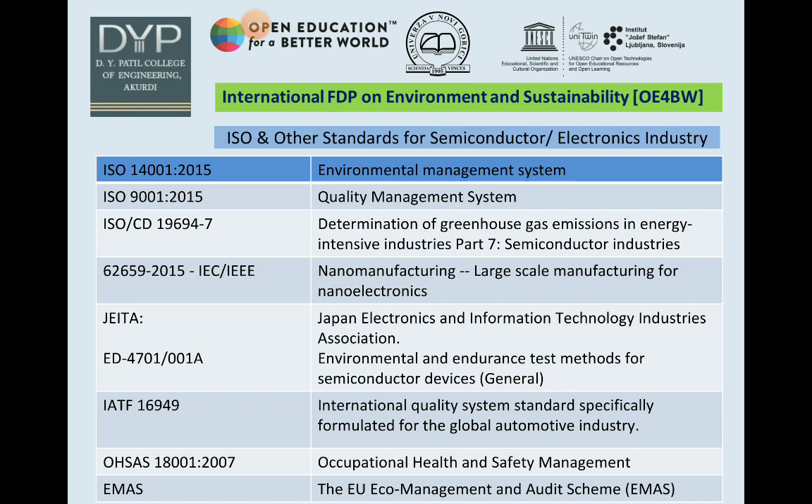JEITA is a Japan Electronics and Information Technology Industries Association standard. IATF, OHSAS and EMAS, these are eco-management and audit schemes followed in the semiconductor electronics industries.

Moving ahead, the emission categories which are described by Greenhouse Gas Protocol are specifically categorized in three classes: all direct emissions, indirect emissions and all other indirect emissions. In the first class, the gas boilers, fleet vehicles and air conditioning leaks, for an example, are considered.

In the indirect emissions, during the production of energy, if any electricity is purchased, that is included. And in all other indirect emissions, sources that do not own or control emissions are associated. So thus, these are the three categories into which all the semiconductor process gases are categorized.

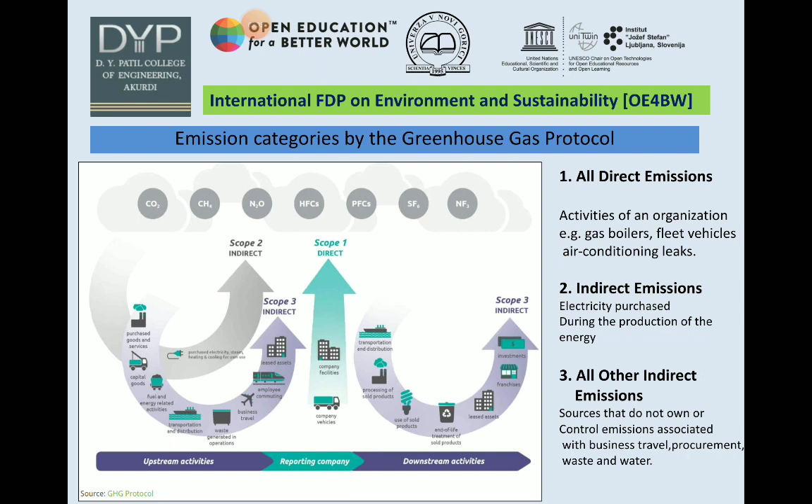Moving ahead, if we see the product carbon footprint calculation, in the life cycle of any electronic product, the carbon footprint can be calculated in the following steps. It may be the carbon footprint of material, carbon footprint of energy and fuel, the carbon footprint related to its usage, and the carbon footprint at the end of life of that particular product.

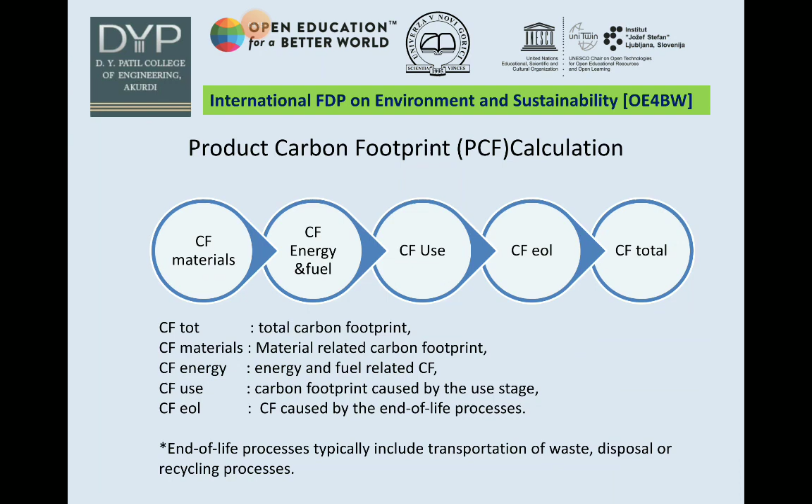So the end of life process typically includes transportation of waste, disposal or recycling process. So all this cumulatively gives the total carbon footprint of a product. Now the parameters which we should be knowing for calculation of product carbon footprint are carbon footprint itself and the global warming potential, that is GWP.

Carbon footprint can be calculated by multiplying the greenhouse gas emissions by their global warming potential value. The carbon footprint amount is used for comparing the radiative forcing of other greenhouse gases relative to carbon dioxide, and hence it is expressed in carbon dioxide equivalents in metric tons.

GWP, that is global warming potential. If I go with the IPCC 2007, the predefined time period is 100 years. So GWP 100 will indicate the 100 years time perspective chosen for the calculation of global warming potential. These are as per the guidelines given by IPCC, that is Intergovernmental Panel on Climate Change.

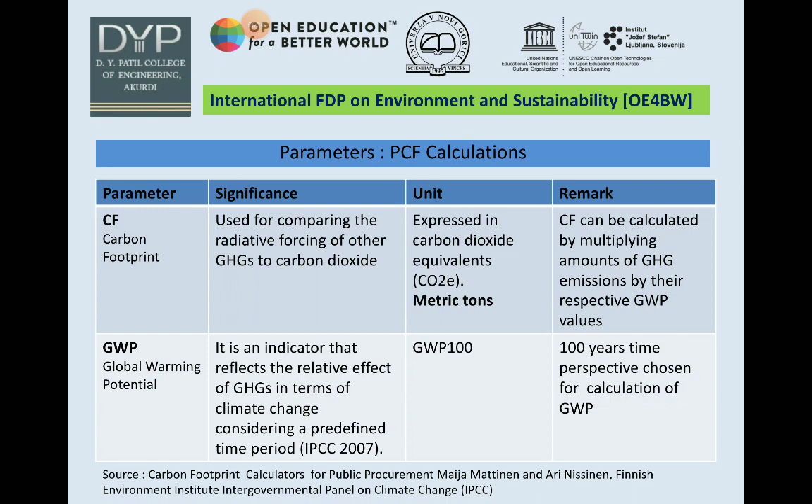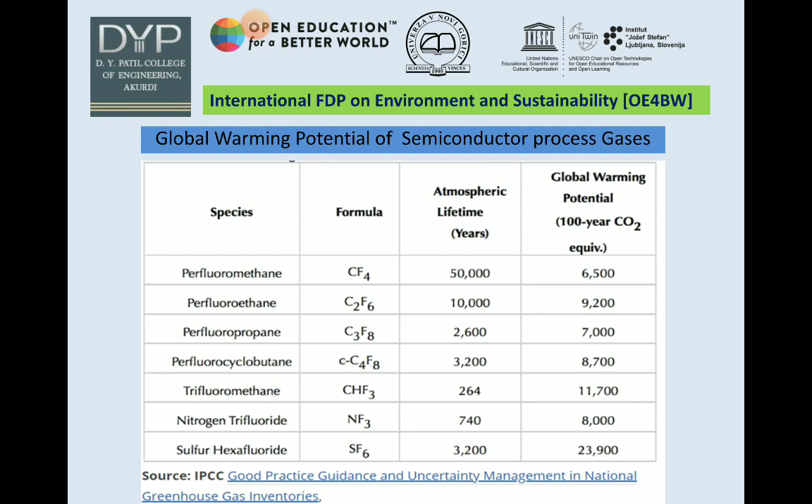If we see the global warming potential for all the gases which are included in semiconductor process, they are mentioned as per the IPCC. For an example, if I want to calculate the carbon footprint of perfluoromethane, that is CF4, the global warming potential for 100 years in CO2 equivalent is 6500, as per the guidelines of IPCC. So in this slide I have listed the formulas and the global warming potential for all semiconductor process gases.

Now if I want to calculate the carbon footprint, I should be knowing the greenhouse gas emission factors. So as per the WSC, that is World Semiconductor Council, and 2006 IPCC guidelines, if the wafer produced has a 200 millimeter or smaller diameter, there are specific gas emission factors for CF4, C2F6 and all the greenhouse gases included in the carbon footprint for manufacturing a particular semiconductor material.

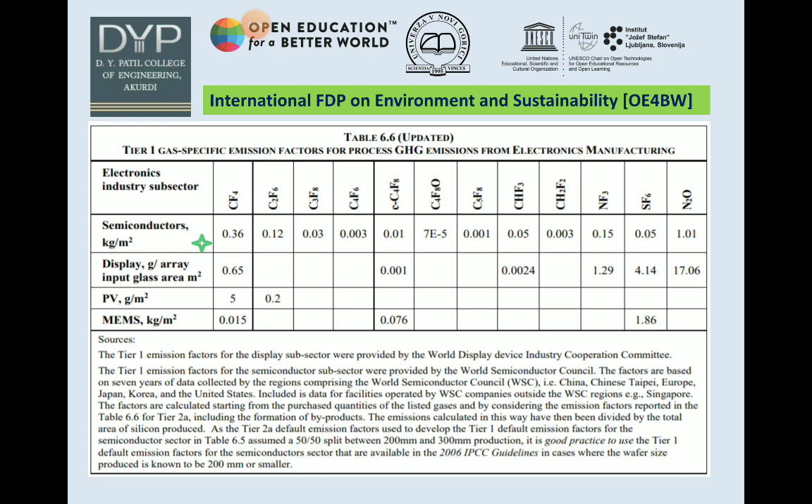Taking an example of CF4, it requires 0.36 kilograms per meter square. So 0.36 kilogram per meter square is the emission factor for manufacturing 200 millimeter or smaller diameter wafer size. So for perfluoromethane CF4, the GWP 100 as per WSC calculation is 65 into 10 to the power 5 kg. The emission factor as per WSC for 200 millimeter wafer size is 0.36 kilogram per meter square.

So carbon footprint for this CF4 will be the emission into the respective GWP. So carbon footprint of a 200 millimeter chip over 1 year, if I calculate, comes as 23.4 into 10 to the power 3 kilogram per meter square. So from here, for 1 year, if a 200 millimeter chip is fabricated, 23.4 into 10 to the power 3 kilogram per meter square, this much carbon footprint is there. So you all can assume how much carbon footprint there will be over a complete industry scenario.

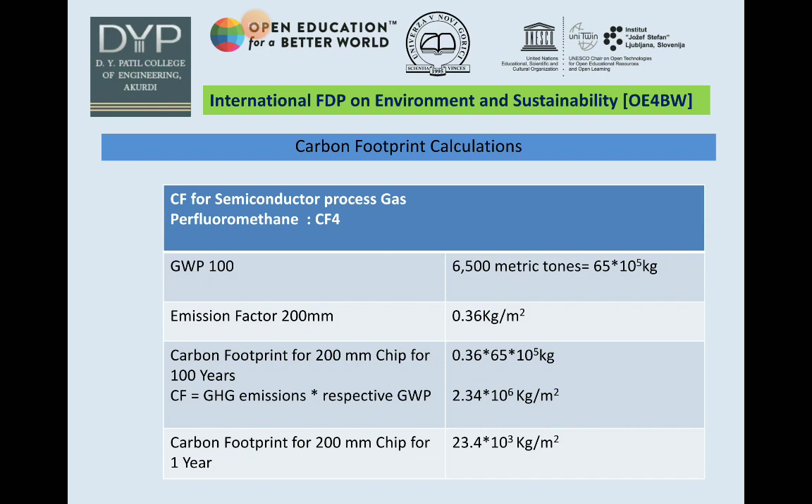Now, criteria for assessing the sustainability performance. If I want to make a particular product or material sustainable, I should be calculating its sustainability performance through some categories. These categories are mentioned in Silicon Revolution: Sustainability Disclosure and Performance in Semiconductor Manufacturing Industries by Swarali Bhatt, a student of San Jose State University. She has taken a period of 2010 to 2014 and has seen the performance of some 20 companies altogether.

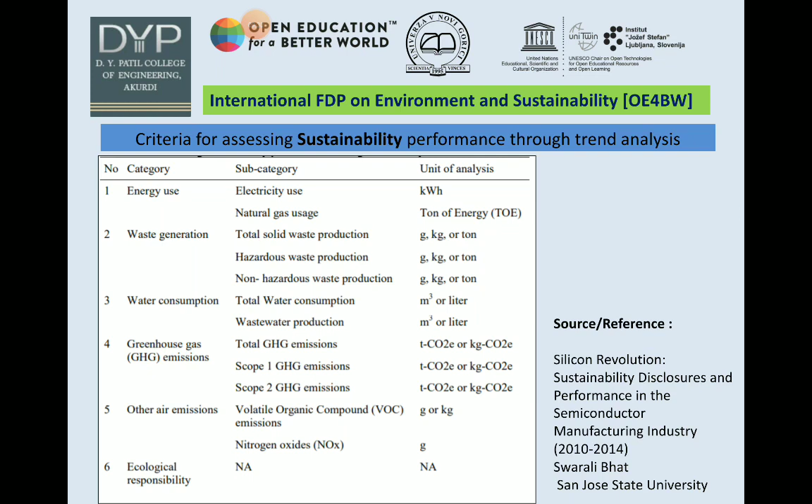By following her interview methods and the calculation parts, some categories have been designed, and they are energy use, waste generation, water consumption, greenhouse gas emissions, other air emissions, and ecological responsibility. All the subcategories and units of analysis for these criteria have been mentioned. Through all these criteria, if we assess sustainability, the performance of the semiconductor industry towards sustainability can be calculated.

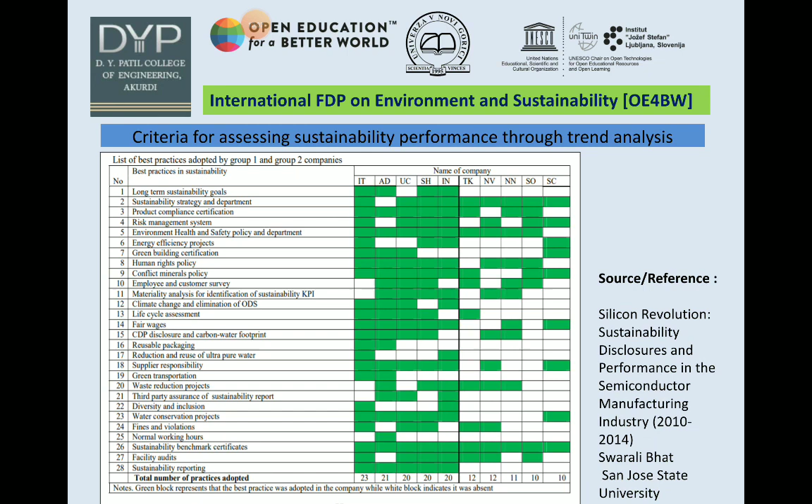In the same reference, the candidate has performed criteria analysis for a few of the companies, and the best practices used by those companies for ensuring sustainability towards the environment have been listed in this slide. There are a total of 28 best practices taken as a reference, and the companies following all these categories will definitely be developing more sustainable products in semiconductor manufacturing.

Moving ahead, if we see the case studies for sustainability in the semiconductor industries, the first case study is Fuji Electric Global. This company has started a power IC with low standby power PWM, that is a pulse width modulation mechanism, for an integrated circuit. This IC has built-in low standby power functions. Considering all the features listed here, this IC has been used in various power supply circuits and can be applied to LCD TVs and printers.

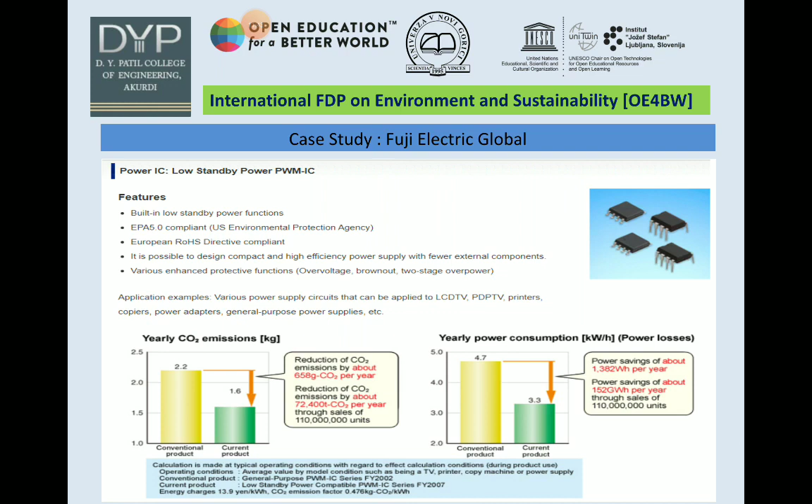When the company measured and compared the carbon emission footprint with the previous year's conventional product, it indicates a reduction of CO2 emissions by about 658 grams per year. Similarly, the second criterion for sustainability, in the second figure, is related to yearly power consumption, including some power losses. They have achieved a power saving of about 1382 watts per hour per year. So this is the sustainable solution they are proposing with this low standby power PWM IC.

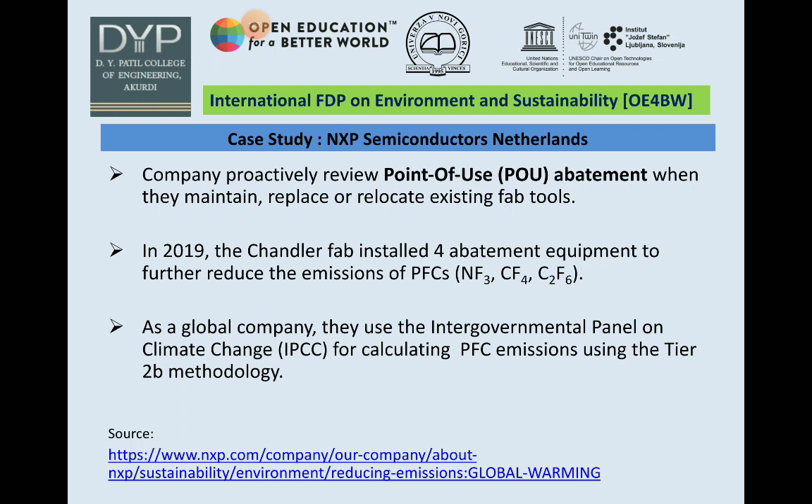Similarly, the second company, NXP Semiconductors from the Netherlands, has proactively reviewed POU abatement. What is this POU? It's point of use abatement when they maintain, replace or relocate existing fabrication tools. In 2019, they published that the Chandler Fab installed 4 abatement equipment to further reduce the emission of perfluorocarbons, which are important chemicals used in the etching of the semiconductor process. As a global company, they use Intergovernmental Panel on Climate Change IPCC directives for the calculation of PFC emissions, and they follow the Tier 2B methodology.

For this company, at the end of the year, if they calculate the total PFC emissions, from 2010 to 2019 the normalized total PFC emissions decreased by 52% by using the Chandler Fab process. But the trade-off definitely is there. The products developed by NXP for decreasing PFC emissions require some additional manufacturing steps, and hence there will be more cost associated with them.

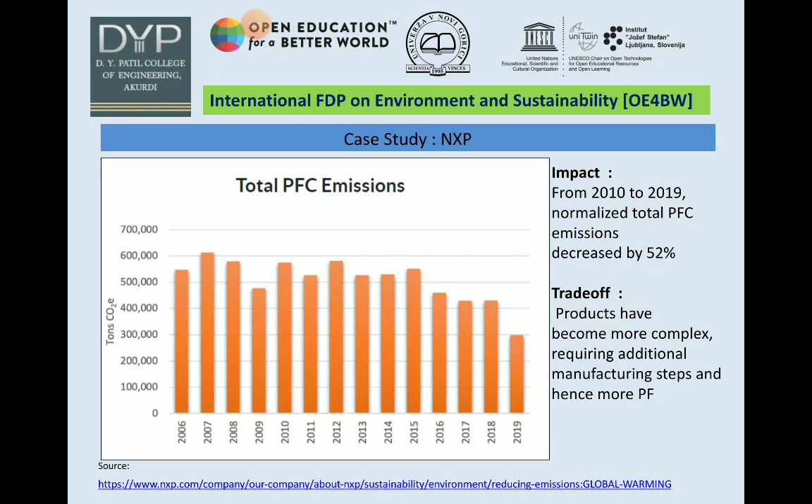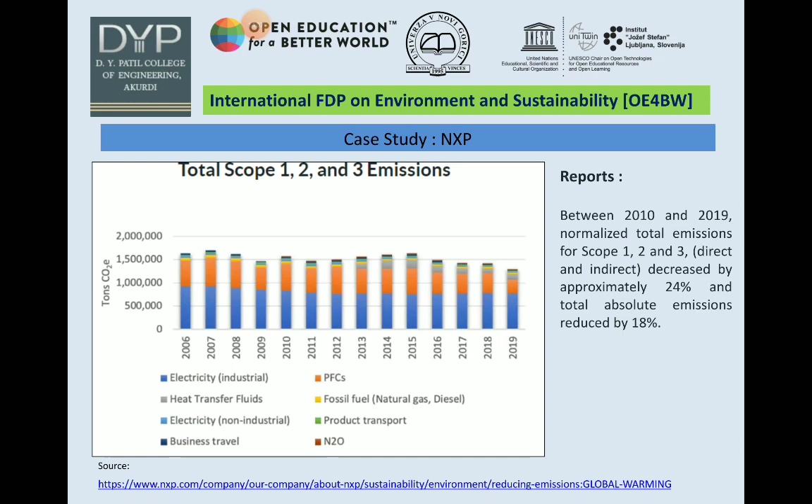Similarly, as per the GHG declarations, the company has monitored the total scope 1, 2 and 3 emissions, which are listed in this graph. Between 2010 and 2019, the total scope 1, 2 and 3 emissions, direct and indirect, decreased approximately by 24%, and total absolute emissions were reduced by 18%. But one factor we should observe is that the electricity requirements have not decreased by that much, which is related to the emission factors of perfluorocarbons. So again it's a trade-off in the NXP solutions also.

Now for sustainability performance, which we have seen in the last video also, we can concentrate on King Yuan Electronics company from Taiwan. This company does chip testing services for smartphones, automotive CIS components, 5G base stations, Bitcoin and microcontrollers. They have taken some eco-friendly measures and a safer work environment for employees, and they have also implemented 30 energy saving measures.

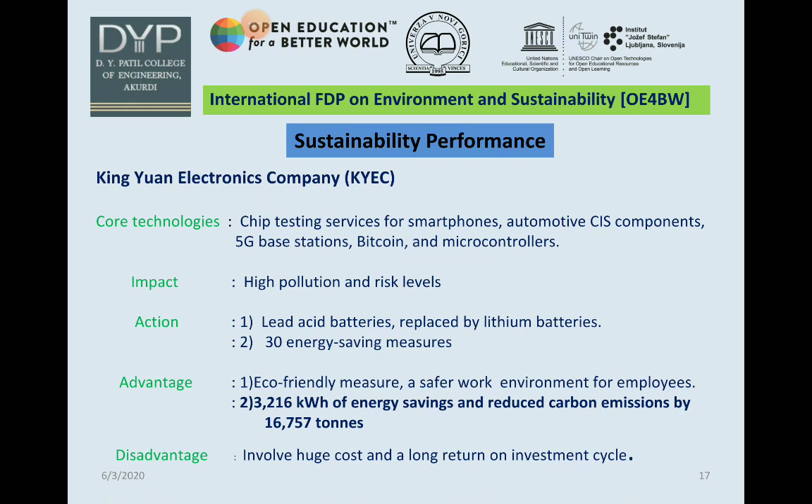Because of these things and replacing lead acid batteries with lithium batteries, they could achieve 3216 kilowatt hours of energy saving, and carbon emissions were reduced by 16,757 metric tons. But similarly, the trade-off which still remains is the huge cost and long-term return on investment cycle.

So what will be the sustainable futuristic approach for semiconductors? It relates to the material used for the semiconductors. Nowadays, research has been initiated in self-healing electronic materials. So what is a self-healing electronic material? They are strain-sensitive, stretchable and autonomous self-healing semiconductor films which mimic the self-healing capability of skin.

This has been reported in Science Advances, where an interdisciplinary research team from the US and South Korea reported a strain-sensitive, stretchable and autonomous self-healing semiconductor film. This reference is listed in Stretchable Self-Healing Semiconductor Polymer Films for Electronic Skin by Thamarasee Jeewandara from Phys.org.

So, for a sustainable approach to semiconductor manufacturing, a trade-off is observed with the emissions of toxic materials. If we want to reduce them, electricity consumption is still a trade-off component. Similarly, cost is also a trade-off component for the fabrication process. So the solution, through research, may be self-healing electronic materials.